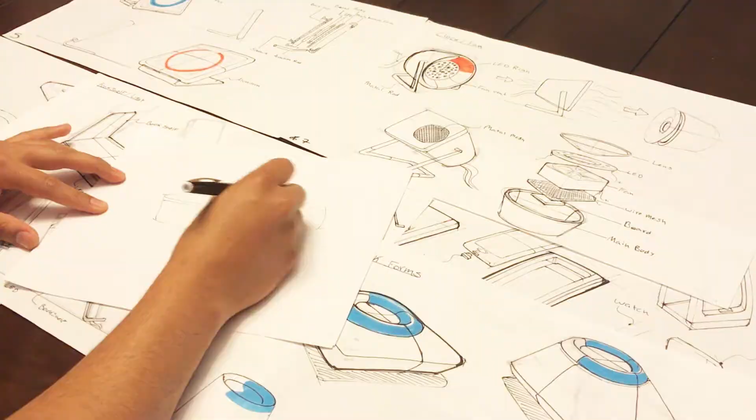I gathered a few images together to understand the material qualities and form direction. I started to explore different combinations of using sound, LEDs, and screens to reduce and control respirations. On some of these, I considered combining the device with a phone dock to make sure the user will put their phone down right before starting the breathing treatment.

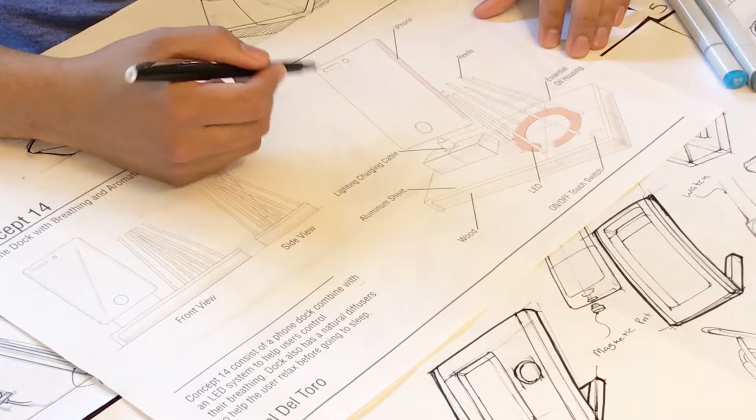In this concept, I am exploring the idea of using red LEDs for the breathing treatment. The breathing treatment consists of inhaling for 6 seconds, holding it for 3 seconds, and exhaling for 6 seconds. I am also considering using reed sticks to diffuse lavender oil.

Overall, this prototype was pretty good, but one of the major problems is that it was going to be too expensive to manufacture, so I had to cut down on the size and get rid of the lavender oil because it was not as effective as the LEDs.

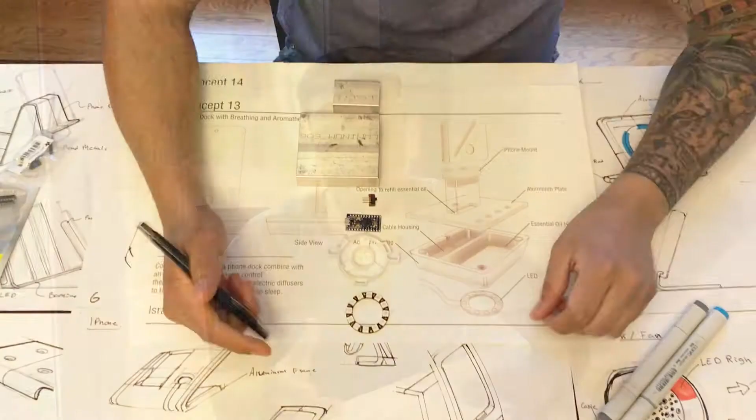On this concept, I am planning on using a 12-bit NeoPixel ring, a 3D printed housing for the LED, a small Arduino board, a regular on and off switch, 1060 aluminum stock for the cable housing, and 1060 aluminum stock for the cable holder.

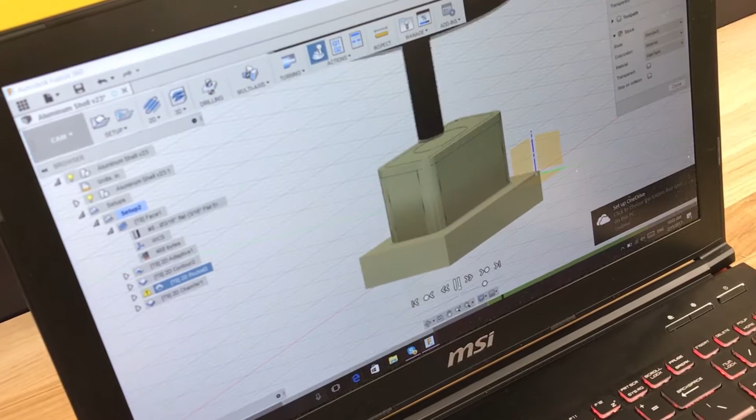After spending a few hours creating the 3D models in Fusion 360, I was able to generate and simulate a toolpath for both the cable holder and the cable housing.

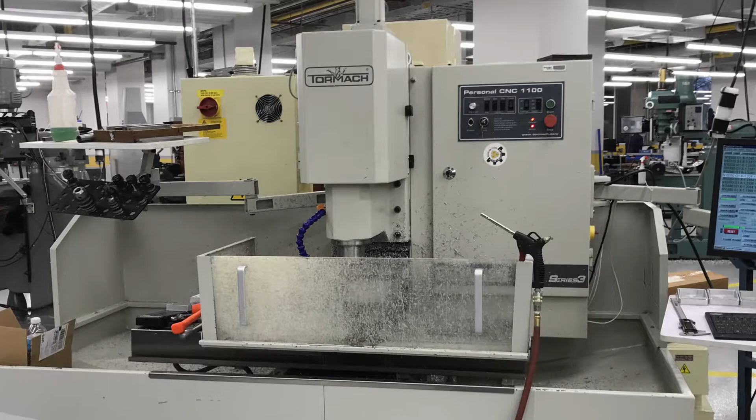The first step was to cut down the 1060 aluminum stock to nominal dimension. After doing so, I had to zero all axes and index my part in the Personal CNC 1100. Using a 1.5 facing end mill, I faced the aluminum stock to make sure I had a good surface to work on. Then I changed my tool to a 2-flute 1/4-inch end mill and machined the perimeter, pocketed the inside, and created a through hole on the side for the cable.

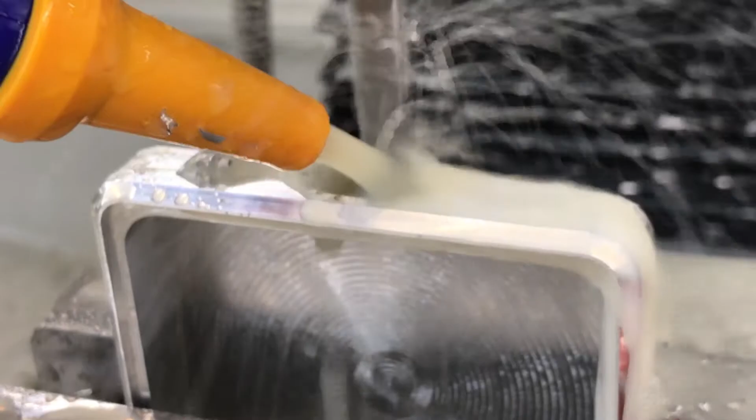After spending a few days machining the aluminum parts and soldering the inner components, I was able to develop a working prototype. This prototype consists of 3 different modes. The first mode is the breathing exercise, which consists of lights increasing and decreasing while the user inhales and exhales for a duration of 4 minutes.

The second mode is meditation, which consists of red and yellow flickering lights, creating an ambient light as if you had candles in your room. The third mode is a night lamp.

One of the most important insights I found based on user testing is that the duration of the inhale and exhale had to increase over the period of 4 minutes, since the user is more relaxed and able to inhale and exhale for longer.

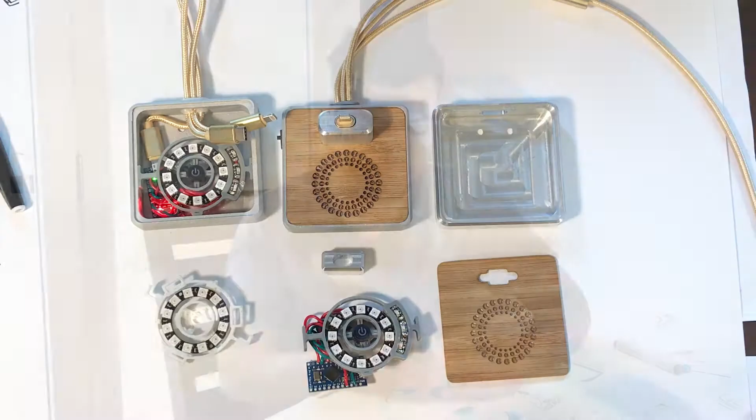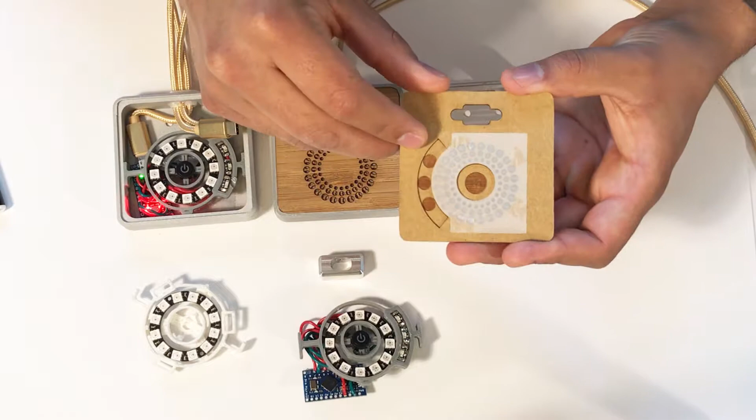One of the very first changes I did was reduce the overall height of the cable housing - there was no need for it to be that big. I also added mylar paper to the back of the fascia to diffuse the light, and reduced the overall size of the cable holder - there was no need for it to be that big either, and I'm saving a lot of money by making it this small. I am also adding individual LEDs to the perimeter of the ring to represent each mode.

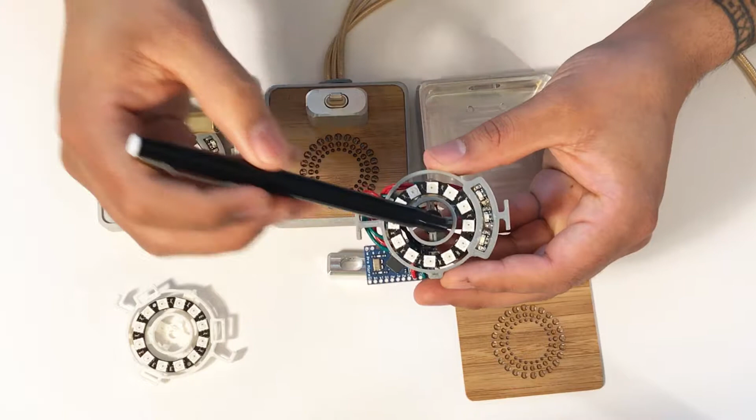This represents the breathing exercise, this one represents the meditation, and this one represents a night lamp. I also got rid of the on and off switch and went with a toggle switch to be able to turn the system on and toggle between the different modes.

As far as the packaging goes, I wanted to create something simple, but I wanted to make sure that users had a very memorable unboxing experience.

Unwinding Dock for better rest. Design and manufactured by Israel Del Toro.